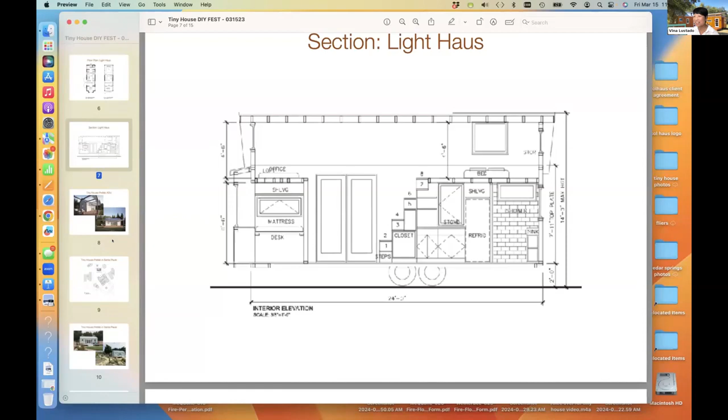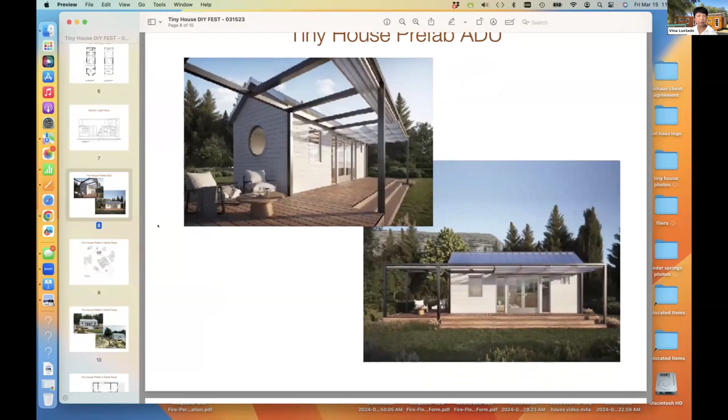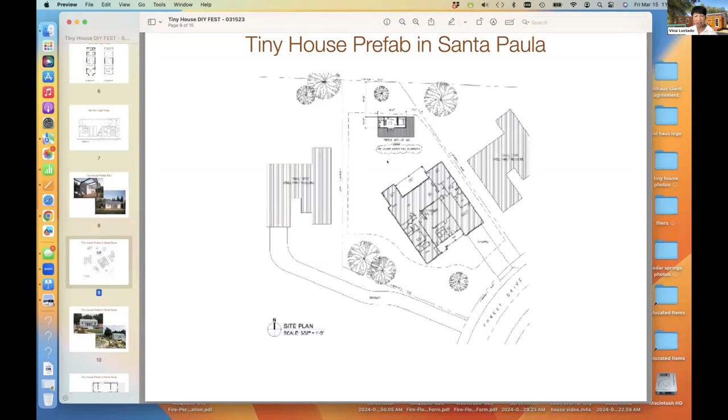One of my latest designs is a tiny house prefab ADU, which has been built - a built unit in the factory, permitted a couple years ago. This is located in Santa Paula. It's the main dwelling off of the street, and the ADU is located at the back. This is about 26 feet long by 10 feet wide, on a large property that allows for a lot of outdoor space.

This is the exterior with a lot of gray water and sustainable features on the landscaping, drought tolerant plants. But I wanted to talk about the floor plan, where again it's all about getting a really efficient system for circulation around all the rooms.

This one again is the same concept with big double doors off of the great room, and the circulation to access each room is very efficient all along the sides. Again, incorporating pocket doors so there's no swinging door occupying more square footage in the space. This is the great room.

I was able to fit a pretty good size kitchen with the induction stove, and a sink that's pretty amazing because it also has a dishwasher. I have a sofa that's built in with storage below - that's key because you need to maximize the storage.

Then also the bathroom was spacious - I was really surprised how it turned out. It's only 4 feet deep by about 8.5 feet long, but it felt really spacious when I went into the unit for the first time. I'll show you some photos.

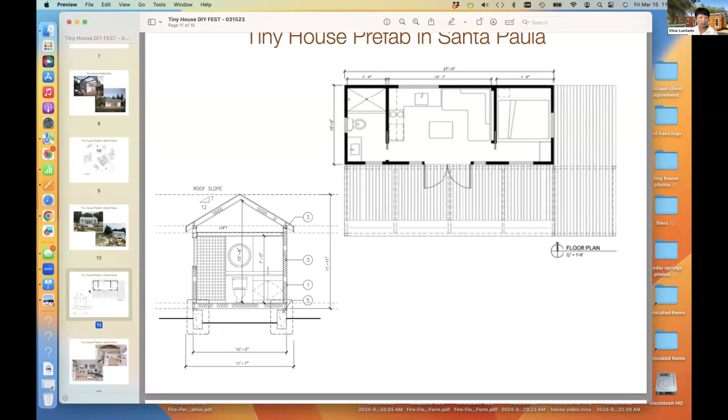So basically, some photos of the interior - looks like this. Here's the great room with the built-in couch. The kitchen feels really spacious because this is all open and you can have a table here. This is a multifunctional table that can go up and down as a dining table, and then a coffee table at this level, so it can function for 2 different needs.

It's an L-shaped kitchen with an induction stove and an amazing sink that also functions as a dishwasher, and there's a small refrigerator here. There are lofts again on both sides, above the bathroom and above the bedroom.

This is more images of the interior with the bathroom. She chose a really different color tile to kind of pop, and I just have a glass panel here. So again, there's no swinging of the doors into the bathroom, and it contains all the water in the shower. It works quite well for her, but it allows it to feel really open.

An open floor plan as much as possible is really, really important for designing tiny spaces. The bedroom here has storage next to the bed, more shelving above, and here's again the circular window that I incorporate in a lot of my designs.

The latest project I have right now is with the city of Agoura Hills, where they want to develop a tiny house community with pretty much the same floor plan. There are 11 units on the property, and 9 of them will be based on the small tiny house prefab I just showed you, and then 2 of them will be slightly bigger at 500 square feet. So again, an example of what can be done with a really small footprint and how it could be used for a lot of different properties and parcels.

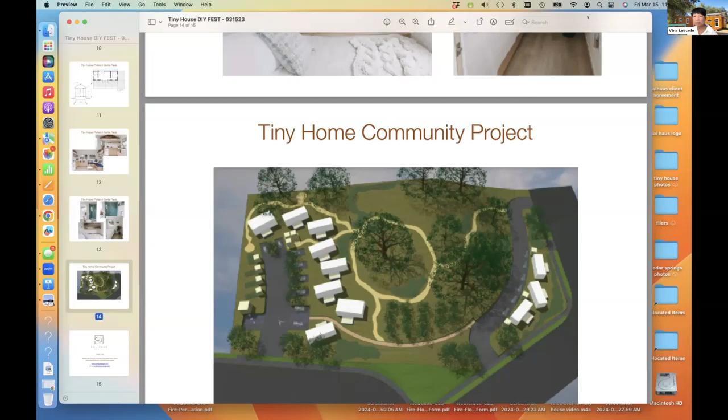Someone's asking about the timing. There's a question about whether this prefab is on wheels, or like any of my structures can be on wheels.

This prefab was built in a factory, so it fits the dimensions of a travel trailer because it's 10 feet wide. It's not the 8.5 foot traditional travel trailer. You would need to get an additional permit for a wider load, but it's a really simple one. It's not the one that requires patrol cars following you. I think it's just additional paperwork that you sign with like DMV or Department of Transportation to get the additional permit, and it doesn't cost very much.

So I always advise designing with a wider width over 8.5 feet because it's amazing how much more you gain in just 1.5 feet. It makes a world of difference, like with the width of the great room, the living room, the kitchen, the bedroom. So yeah, that answers that.

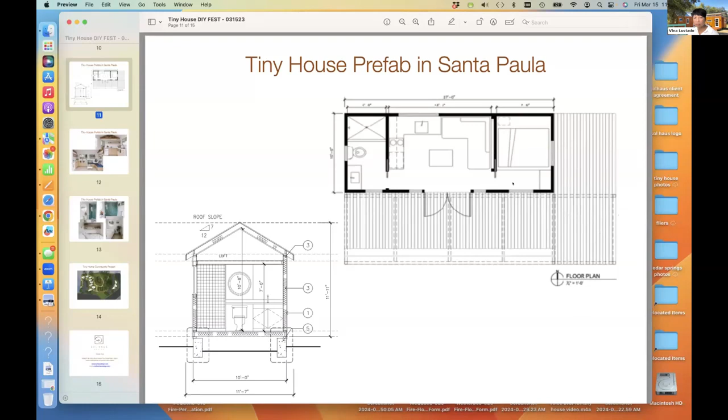No other questions yet. There's another question: what should design or plan services cost, and what should you expect for that? So the next question was the cost for my design services, and I think there are different levels. I provide my tiny house designs based on the Light Haus and my own tiny house, which is on my website. That's just a plan you can download on my website, vinastinyhouse.com plans. It's about 300 or 350 for those plans that I've already made.

But for custom plans, there are 2 levels. One level is, I think, $995, if you just want a floor plan and exterior elevations with the windows and doors basically mapped out on AutoCAD with the dimensions. But if you want an electrical plan, a lighting plan, and interior elevations, I think that's $1,495 or $1,395. There are 2 levels, but you can look it up on my website under Vina's Tiny House Plans, custom plans. You can also send me an email if you have more questions, because I have a whole write-up on the process of how it works, since I usually go step by step, starting with a floor plan first and having you approve it.

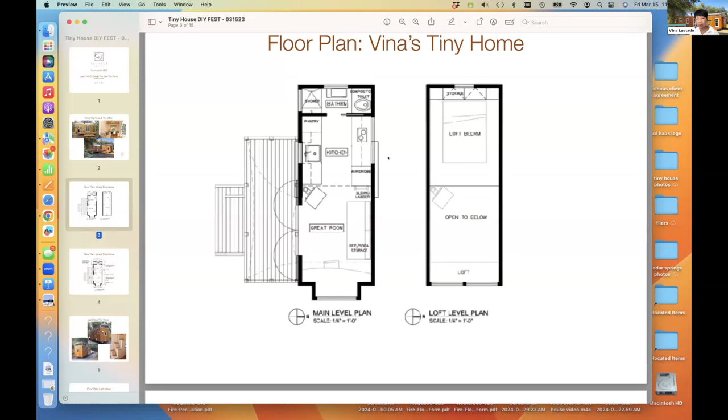And then inside the Lighthouse tiny house, this is designed for my client. They didn't request a full height wardrobe. This is supposed to be a pantry, this full height cabinet. I think they just used it for a pantry, but they didn't request a full height cabinet. They just have wardrobe storage by their bedroom loft upstairs, so I think they just go upstairs to store their clothes. But they've been living in it for at least 5 years and they've been happy, so apparently it hasn't been an issue.

I'm asking how heavy the Lighthouse is. Okay, next question is the Lighthouse weight. So this one might be like 12,000 pounds, because I know the rating on the trailer was 14,000 GVWR, gross vehicle weight rating. So it was definitely below that, maybe 12 to 14,000. We intentionally made all the kitchen items light, like there's no stone, it's butcher block. The heaviest thing was probably the refrigerator. And the built-in items were taken out of the unit when it was being traveled, except the sofa was not built in, the cabinets were built in, but all the appliances were taken out before I traveled. So it was, I'd say, like 12,000 pounds.